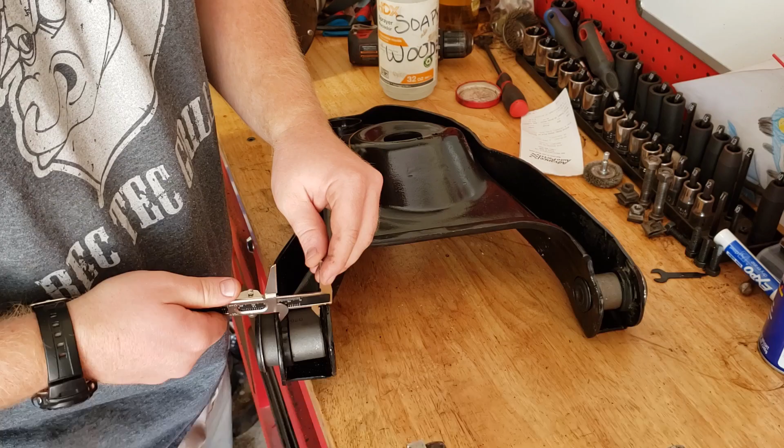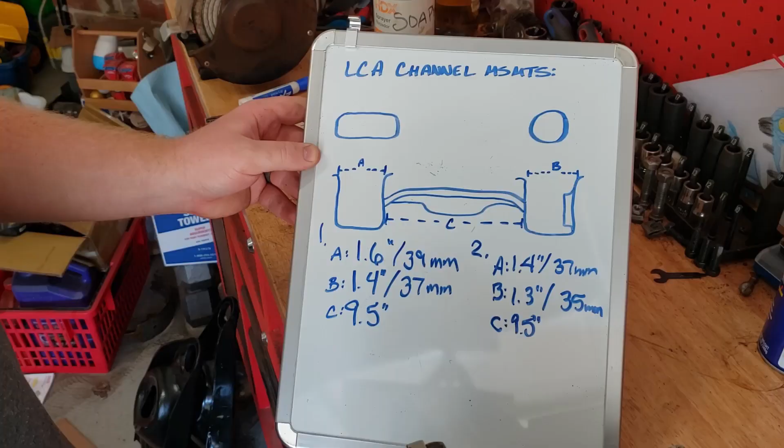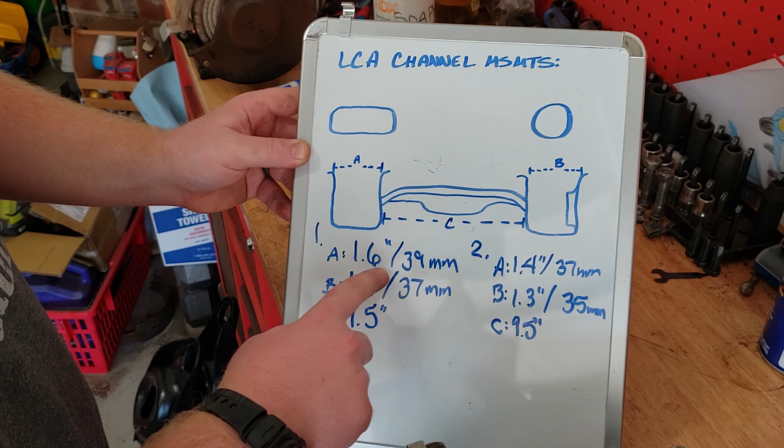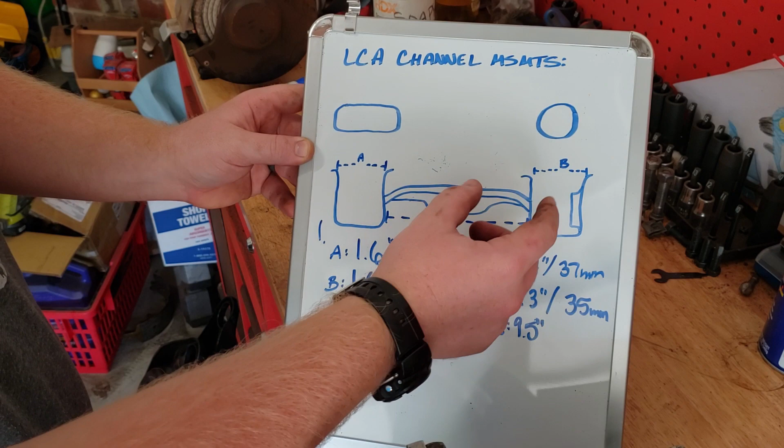Here's our measurements for the lower control arm. I have my ovular channel here with A. This is control arm 1, the one that already has the bushing in it, and control arm 2 is the one that doesn't. A is my ovular, B is my circular side, and C is my measurement between the two arms. So I have a pretty large disparity here between 1 and 2. I think 2 is what I'm supposed to be at, and I think the bushing in control arm 1 is spreading it out.

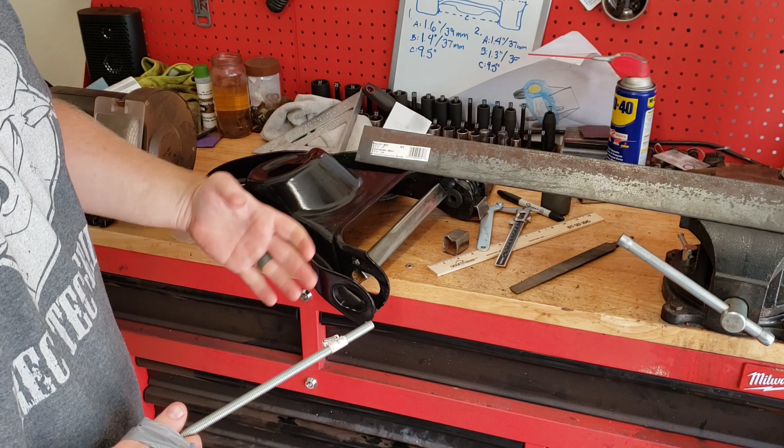My friend Dave had an idea. He hit me up last night and said, how about you try taking 2 sockets on each side, take a piece of all thread, thread it through the bushing, and then use nuts. I'm also going to use some washers, put them on the ends of the socket, and squish the bushing in that way.

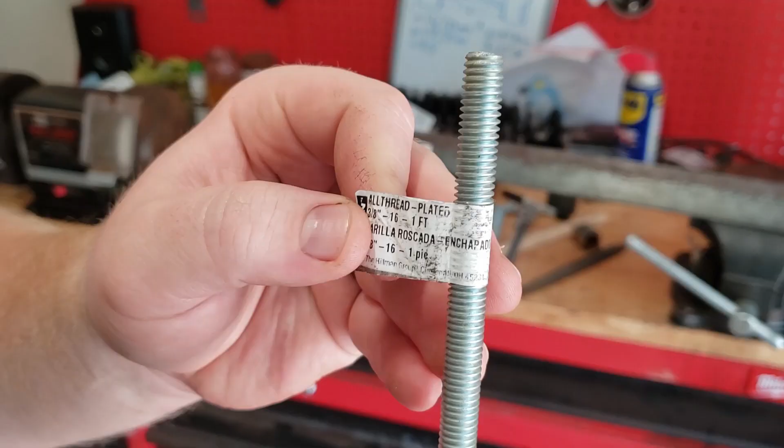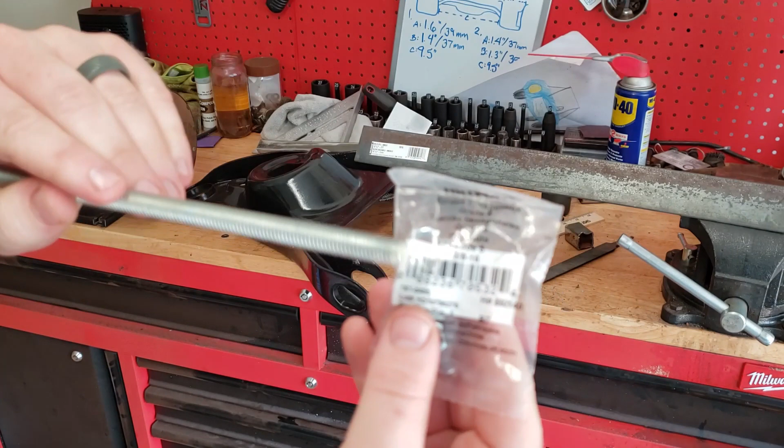In case you're wondering, this is all thread. When you're looking at these, 3/8 inch is the outer diameter, also called OD. 16 is the thread per inch count, so 16 written other ways would be called 16 TPI, thread per inch. And it's 1 foot, that's the length of this bar. So when you're looking for a nut, you see right here it says 3/8, 16. That means you have a 3/8 hole and a 16 thread per inch thread. A little bit of information there, this can apply to anything. Even if you're not doing car parts, if you need something threaded and need a nut, that's how you can go buy it.

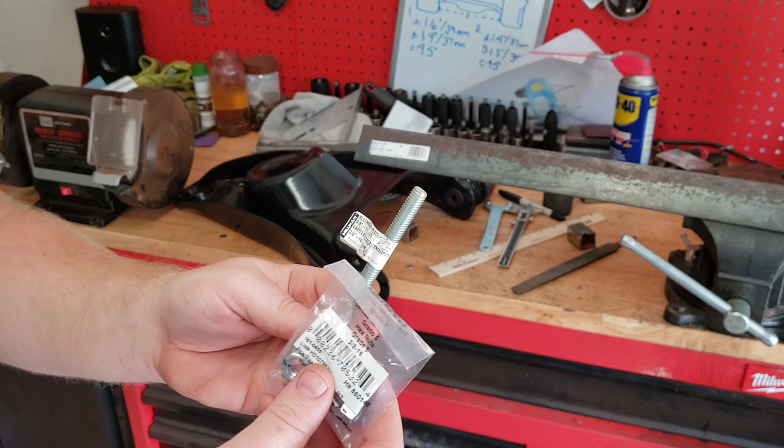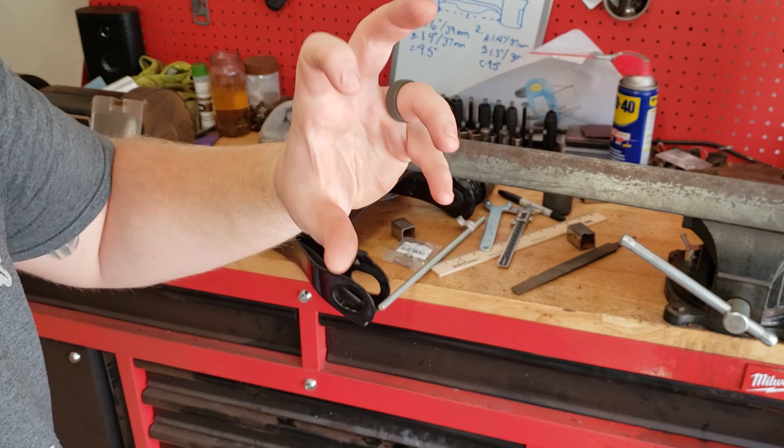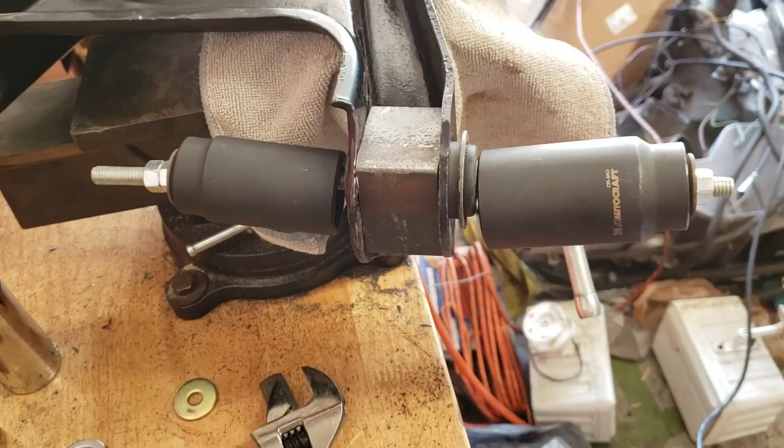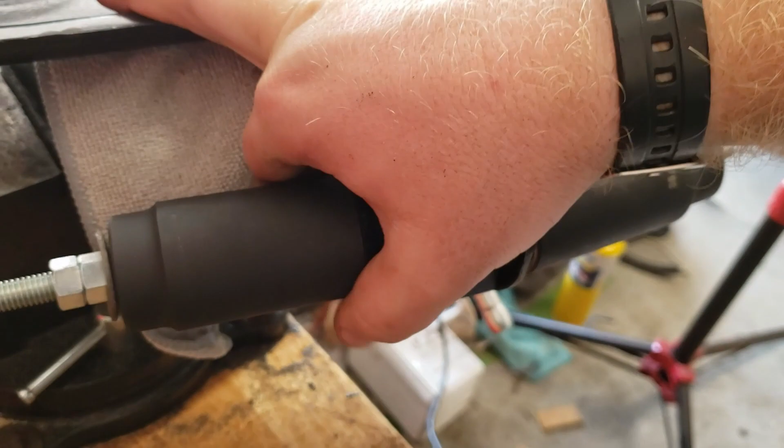I'm going to go slice this off real quick, be right back. Here's where we're at. The idea by Dave is working, the bushing is actually starting to go in. I needed to cut this angle iron bigger than the channel, and had to pound it in because the channel, like I said before, had collapsed, so this bushing wasn't going in straight. But it doesn't just look like it's working, here, hold on. It's going through. I can feel all of the edges of the bushing going in.

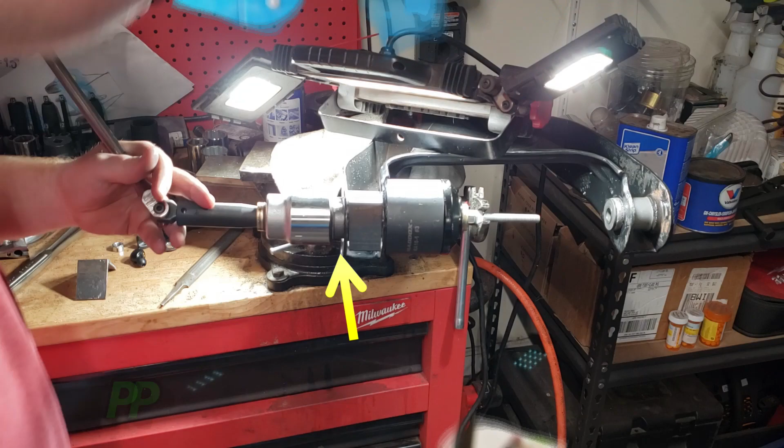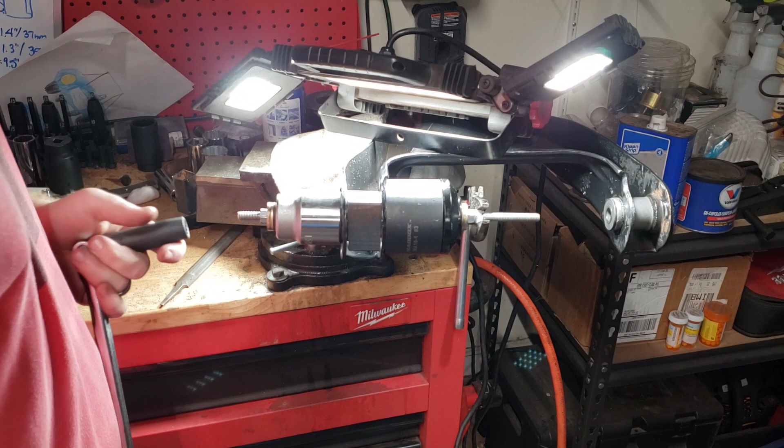So it's working, that's exciting. I'm going to get back to pressing. That's awesome. Thanks again, Dave.

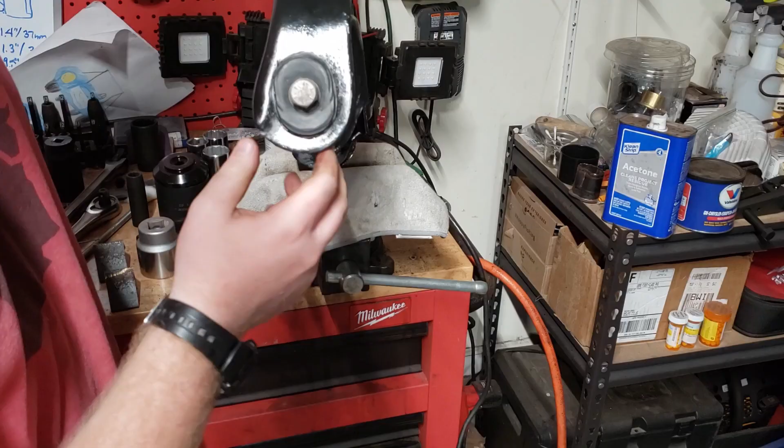There was no way I was going to be able to push this in with that rubber hanging out on the side of the lip. That was just an acceptable loss. Here's what I meant about marring up that rubber. I really don't know how you could avoid that, because on this bushing there's a pretty solid lip that you can use to press on. With this one, I don't know how else you would do it.

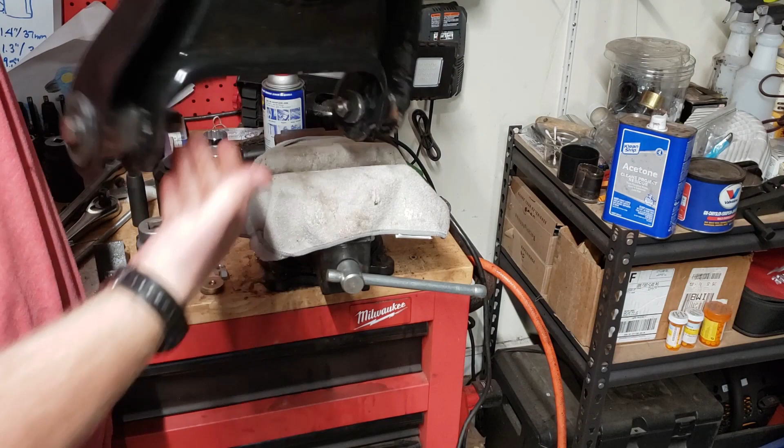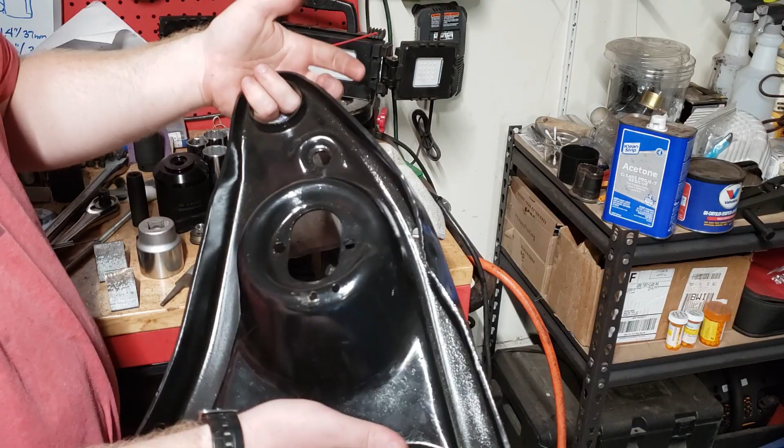Anyway, bushings for one lower control arm are done. Still have to get the ball joint pressed into it, but that's great. And then I'll get the bump stop.

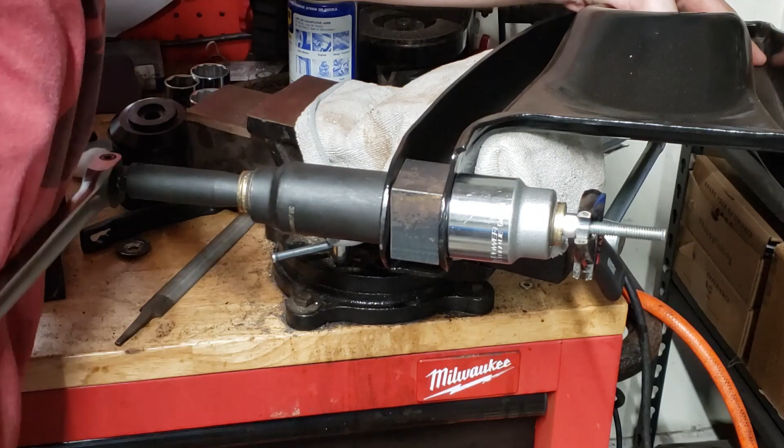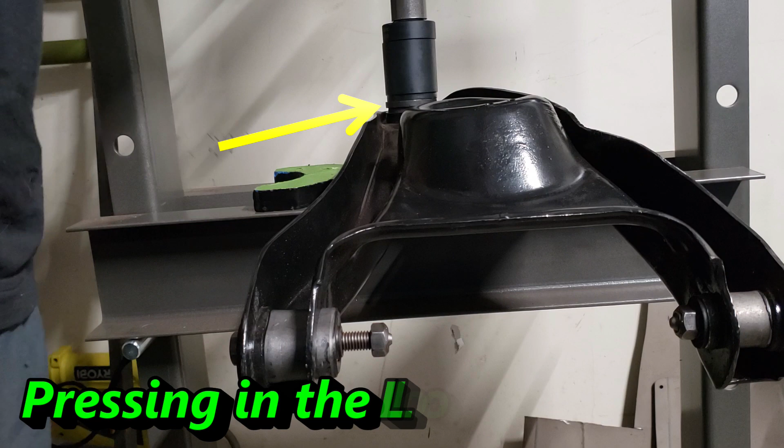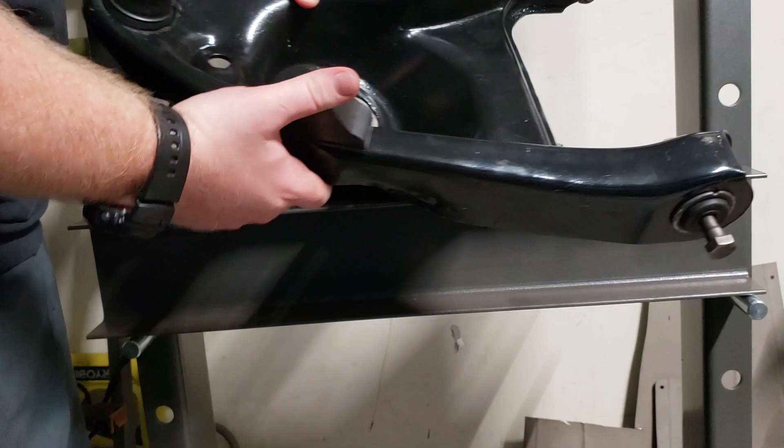That didn't feel great. Ball joints in, bump stops in. I'll tighten that down, last piece of the puzzle. Get that last bump stop in, my Zerk fitting, and then we're ready to put these on the car.

As you saw, lower control arms are all done, ball joints are in, bushings are in, all of our parts are ready to go back in. Next video is going to be all about putting everything together, so we're not going to have any more parts - you don't have to worry about 'oh, we're going to do this part.' No, everything's going to go back in. I pretty much plan on, by the time that next video drops, doing a test drive. That's where I want to be by the time the next video comes out.

To get there, it's going to be a lot of work, but I've got a pretty good weekend coming up, so I'll knock it out. If you saw any tools in this video that you liked, please check out the description for links to those tools.